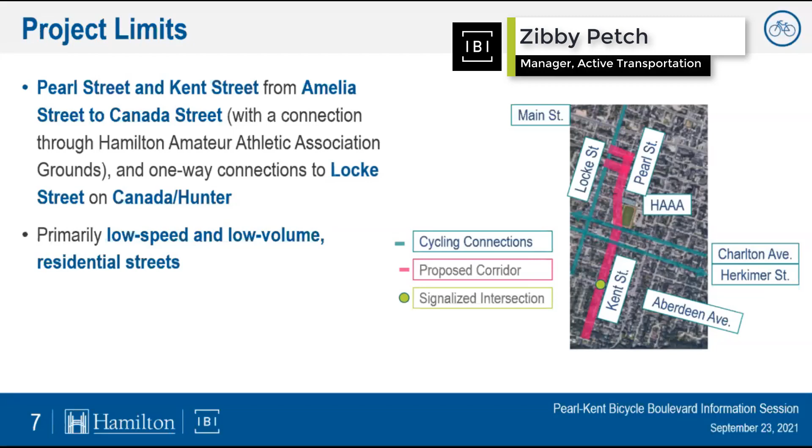Thanks, Trevor. Good evening, everyone. I'll provide an overview of the proposed changes along the corridor, and then we'll open it up to questions. Our project limits include Pearl and Kent Street between Amelia and Canada, along with two short connections along Canada and Hunter to connect to Locke Street.

These are primarily low speed and low volume residential streets now. Through some design changes, there's an opportunity here to create a really attractive corridor for people walking and cycling. From the perspective of the cycling network, this is an important north-south corridor. It provides an alternative to Locke Street through the Kirkendall neighborhood, and it intersects some key east-west cycling routes along Charlton and Herkimer.

The concept of a bicycle boulevard along this corridor was originally identified and funded through the 2018 Ward 1 participatory budget process. There was also a volunteer-led Jane's Walk here in 2019. I'll also note that bike boulevards are identified as part of the city's COVID-19 recovery mobility plan.

Project objectives include expanding the citywide cycling network with connections to existing east-west facilities, enhancing corridor safety and livability through calming vehicular traffic and speeds, as well as opportunities to introduce beautification, and using a pilot approach with rapid implementation to grow our understanding of how bicycle boulevards and applications work in Hamilton.

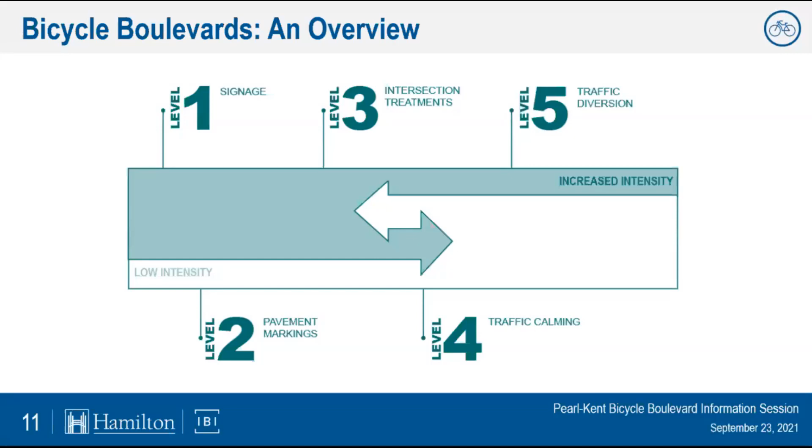This project is proposed to be implemented as a pilot with an opportunity to test the design and adapt it over time. So materials may vary from simple, quick to install materials versus more robust long-term materials. We can test performance over time.

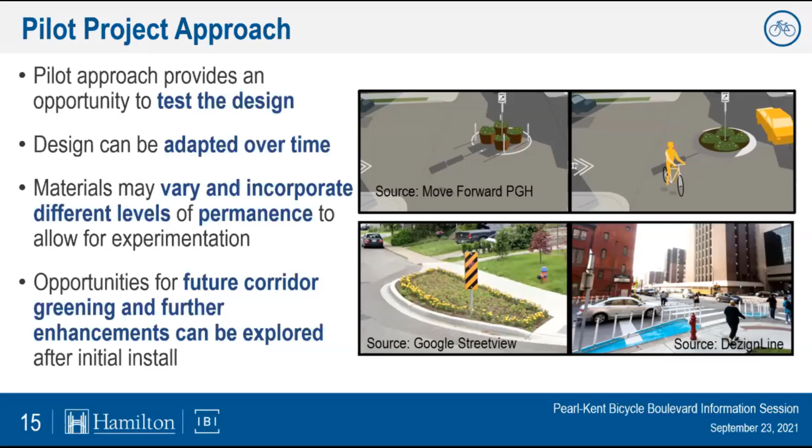Let's start from the bottom of our corridor, Kent Street, and talk about what this looks like. A typical mid-block section along Kent Street will remain very similar to today. There's currently parking on one side with two-way vehicular traffic, and this will remain as is, with just the addition of pavement markings and signage. Parking will not typically be removed mid-block.

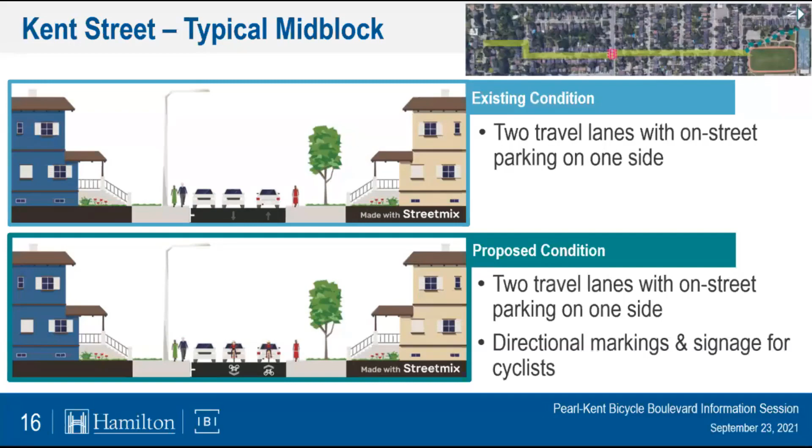We'll walk through the corridor from south to north. To orient you, Amelia is shown on the left of the screen. That's the south end of the corridor. North is to your right. So we'll walk through in that order.

Starting at the south end, you'll see this green line along the full limits of the corridor. That represents the pavement markings and signage that will be throughout. And then you'll see individual features at each location. The first feature you'll see is a curb extension proposed right at the corner of Amelia and Kent, which will help to slow turning vehicles.

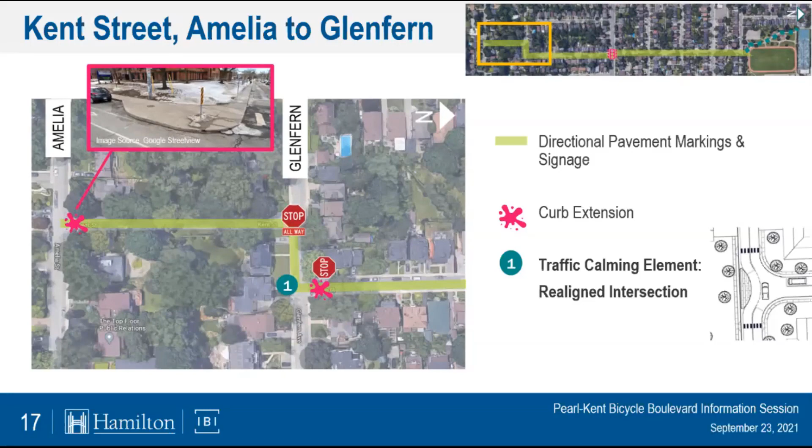Our next feature is proposed at the Glenfern and Kent intersection, proposed as a realigned intersection, again just to control speeds through that intersection.

Moving northerly as we approach Aberdeen, no specific interventions, although we have noted the need to improve detection of cyclists right at the intersection of Aberdeen to make it easier for cyclists to trigger the pedestrian signal at that location. So that may or may not be part of the initial pilot, but it's certainly a need that we've identified.

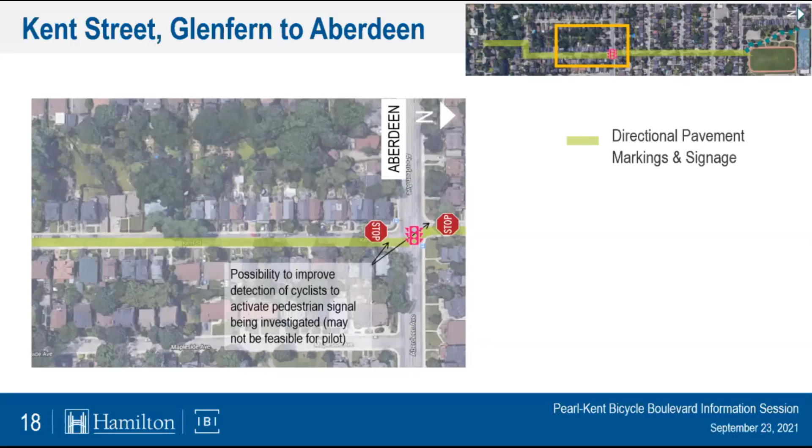Continuing to move north, we've proposed a couple of traffic circles. These would be installed in the middle of the intersection and help to slow turning speeds at the intersections of Homewood and Herkimer, in addition to our pavement markings and signage.

As we approach Charlton and HAAA Park, you'll see that we have proposed one section of contraflow bike lane. This would be a short section just to allow cyclists traveling southbound through the park to make a left turn to continue further south along Kent Street, helping with that offset intersection.

With that introduction of the contraflow bike lane, we do expect to lose about one parking space in that location.

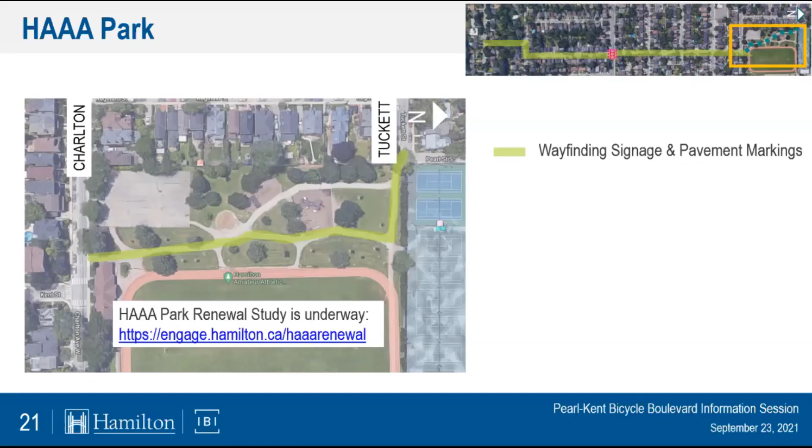The wayfinding elements of the bike boulevard are expected to be carried through HAAA Park to guide people walking and cycling out to Pearl Street. I'll just note that the HAAA Park renewal study is currently underway, and we've got the link there.

Okay, so then we arrive at Pearl Street, continuing to move north. This section of Pearl Street presently operates one-way southbound for vehicles, so in order to provide two-way access for cyclists, we're proposing to add a contraflow northbound bike lane here. I'll show you what that looks like on the next slide.

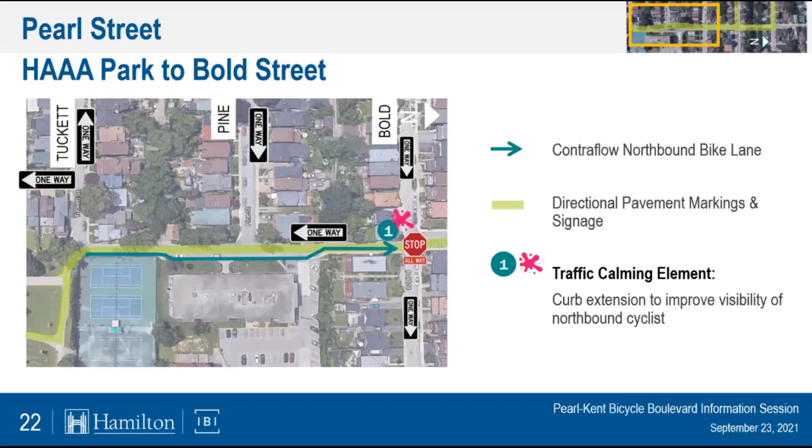With our contraflow bike lane coming down to the intersection of Bold, we're right at the bottom of the hill there. We did want to introduce a curb extension on the south side of Bold just to improve visibility for drivers right at that intersection, to ensure that they can see cyclists and pedestrians coming down that hill.

This should give you a better idea of exactly what's proposed mid-block through this segment. We have two typical sections along this stretch: sections without parking and sections with parking. For sections without parking, we're basically narrowing the existing travel lane and providing a northbound contraflow bike lane along the right side of the road.

Along the frontage of 137 Pearl, there's existing parking. That parking would be maintained, but shifted away from the curb, with our contraflow bike lane coming between the parking and the sidewalk. This has a couple of benefits: a little section of parking-protected bike lane, and improved conditions for pedestrians along that stretch. It's quite constrained there.

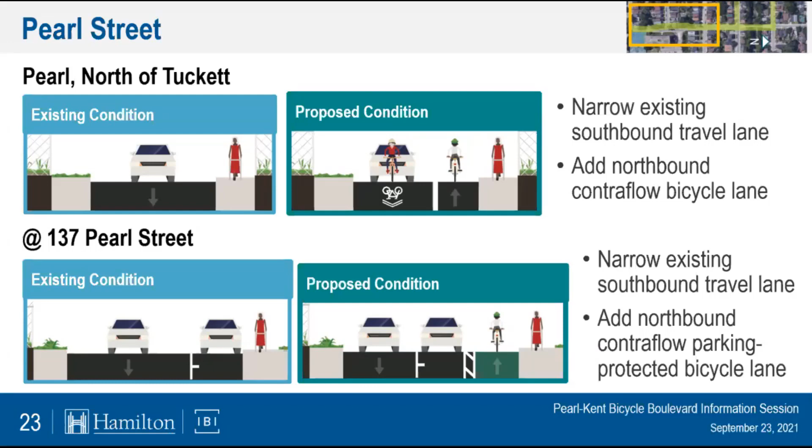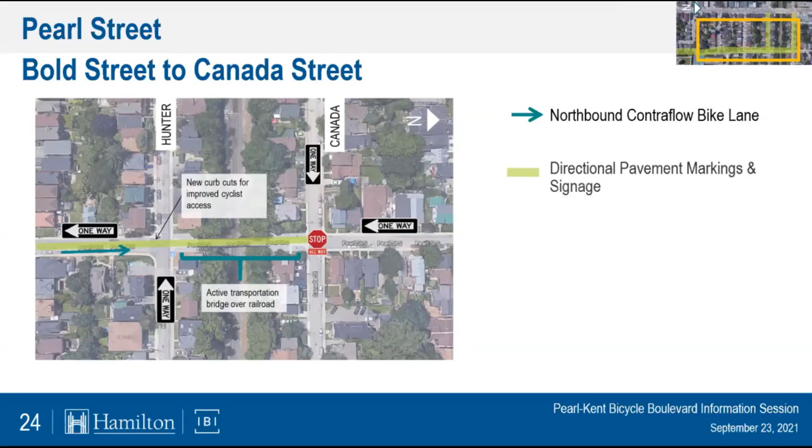As we head north of Bold, approaching Hunter, we will keep the contraflow bike lane on the right side of the road, and I'll show you on the next slide what that cross section looks like. As we approach the existing active transportation bridge, there will be some new curb cuts to help improve access to and from the bridge. Let's take a look at this mid-block section.

The existing condition has parking on the right side of the road. We're proposing to flip the parking to the left side of the road and run the contraflow bike lane up the right side. We don't anticipate a huge change in the number of parking spots based on the driveways on both sides.

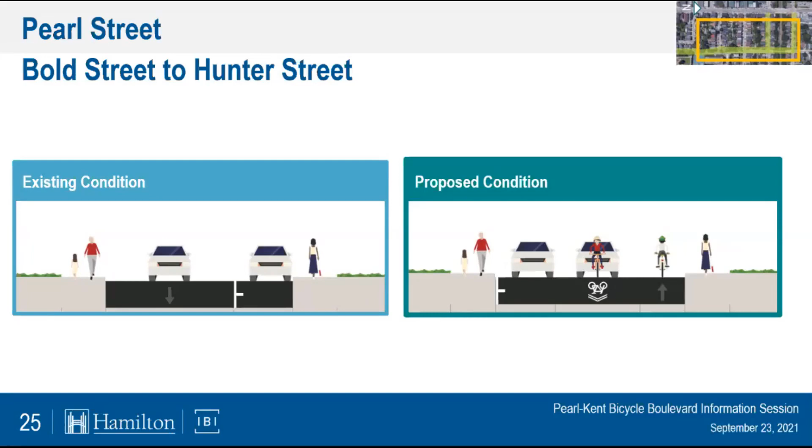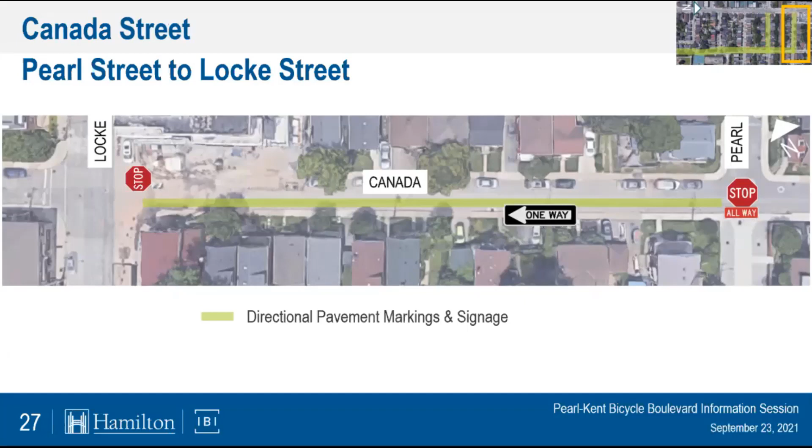And with that, I will turn it back to Trevor to talk about project timelines and next steps.

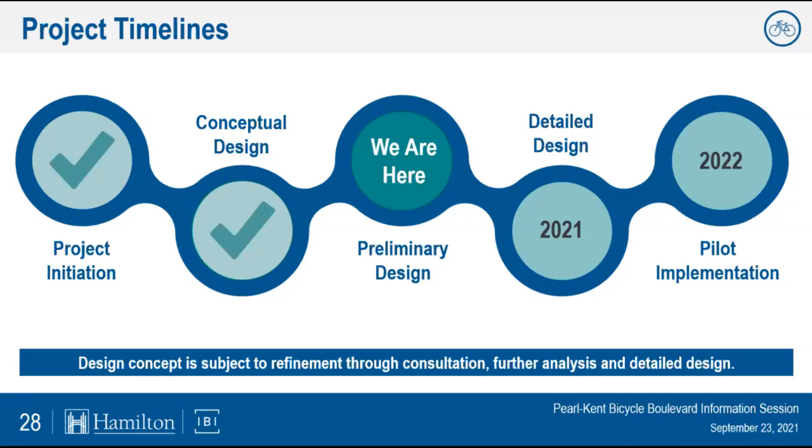Thank you, Zibby. So in terms of where we are, right now we are in the preliminary design stage. This is when we wanted to meet with the community to share information on the preliminary plans, answer your questions, and incorporate your feedback. Moving forward, we will advance to detailed design later this year, and we are looking to implement this project in early 2022. As noted on the slide, this design concept is subject to refinement through consultation, further analysis, and detailed design.

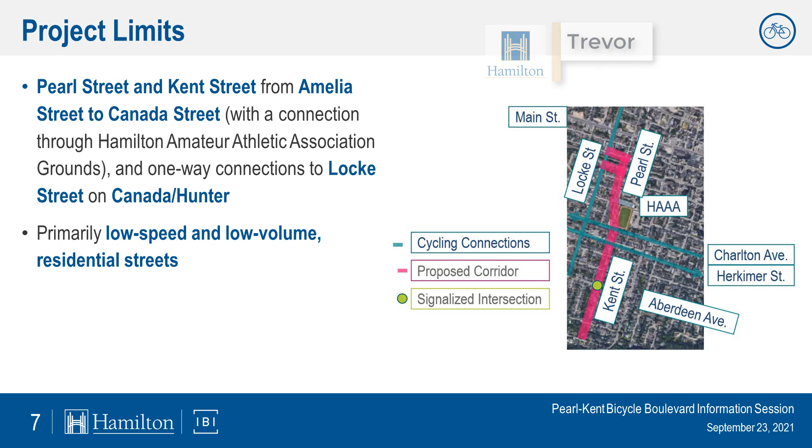I can start answering, and Zibby, feel free to join in. The reason for the connections to the Hunter and Canada section—maybe we can go back to the overview map. It's ultimately to provide for cyclists traveling northbound along Pearl in the Contraflow lane. They would be going onto Hunter Street, so that'd be the natural left in order to connect them with the existing bike lanes that already exist there.

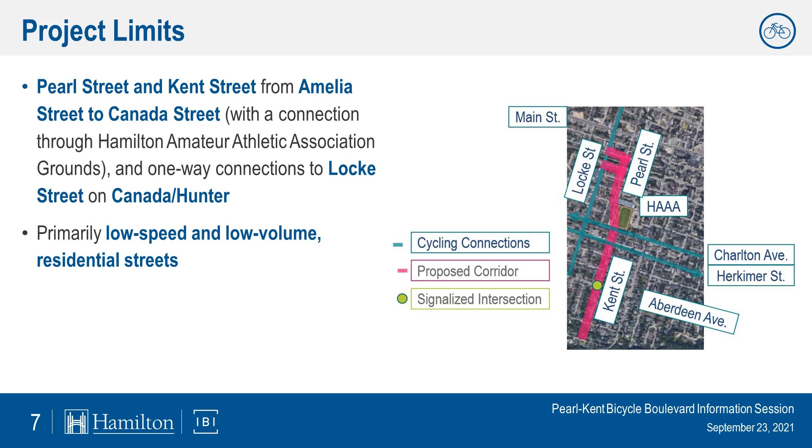Similarly, for the Canada Street connection, it is to connect cyclists traveling along Locke to allow them to travel southbound on the Pearl Street connection. As Zibby mentioned, along those two segments we are only looking at providing pavement markings and wayfinding.

So we don't expect a huge amount, there really is no physical change per se. One of the longer term visions for this corridor is to continue it further north. However, at this time we are still waiting to coordinate with the LRT team on that. So we do want to provide these connections to Locke Street in order to provide that interim measure right now. Anything else to add there, Zibby?

The pavement along this route and through to York is generally poor, which is a huge problem for cyclists right now. Will the street paving be upgraded as part of this project?

I'm just trying to check the programming for repavement within engineering services, because from an operational perspective we don't have any plans to resurface. So we would just be looking to maintain it.

Go ahead—well, sorry, while you're looking at that, I can talk about some work coming to the Strathcona section of Locke as part of some water work that's happening. And then there is discussion on the other portions of the trail of the Boulevard.

My dashboard's not cooperating with me, the asset management dashboard, unfortunately, so I can't answer if that's in the books. But I think the answer to the question is that we aren't looking at doing resurfacing or reconstruction associated with a pilot directly. Yeah, it's indirect. Thanks.

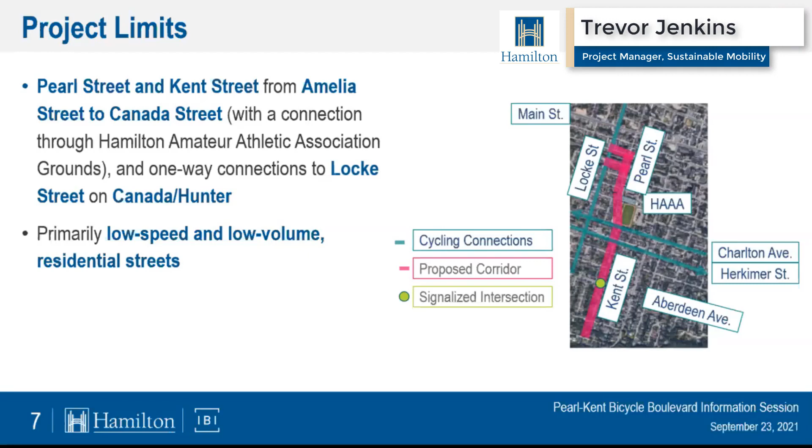Right now, what we do need to do is coordinate those works with the LRT team to make sure any bicycle crossing there is consistent and provided. With the MOU now being signed and that office being staffed, we hope to be able to move forward once we can coordinate with that team. But right now there's no scheduled estimate for when that will happen.

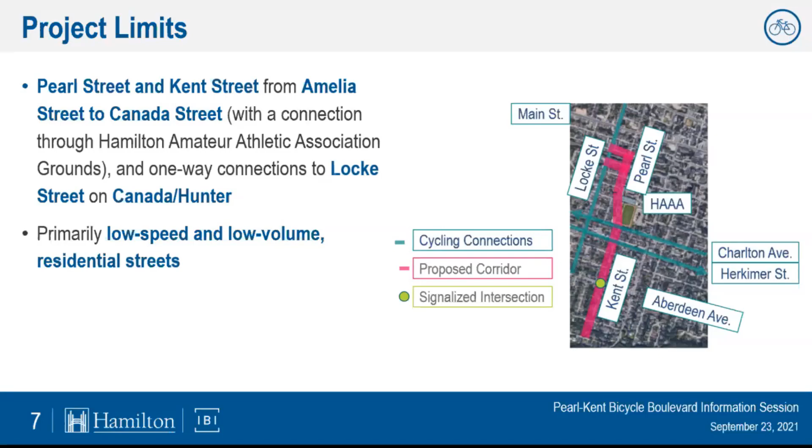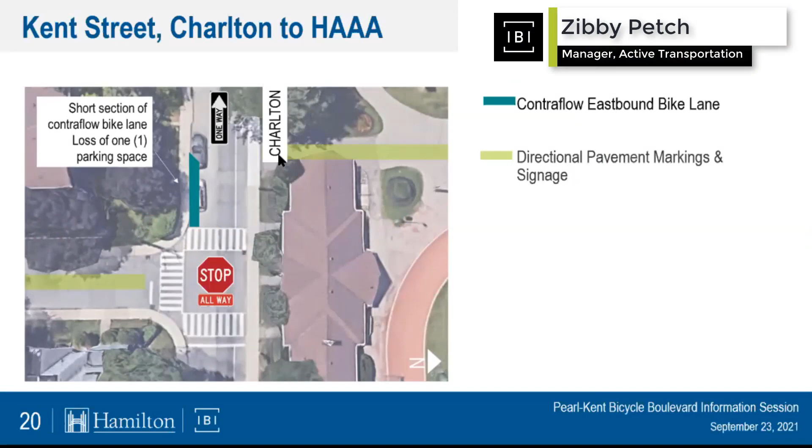How exactly will cyclists traveling south out of the HAAA grounds cross Charlton to the bike lane stub? So as a southbound cyclist coming through HAAA, the onus would be on you to safely negotiate that movement. You wouldn't have right of way to make that movement. You would be looking out for through vehicles and then making that maneuver when safe to do so.

So there's no priority crossing we can provide because we're so close to the intersection. It would just be a yield movement whenever you can find a space to cross.

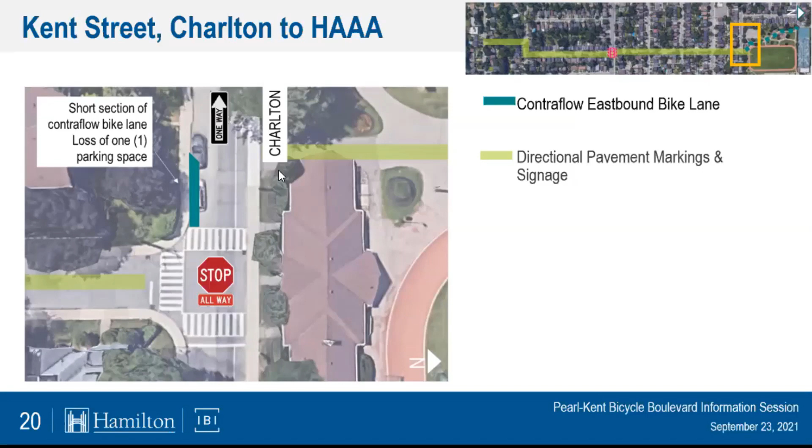Do the traffic circles use any additional space? How do the traffic circles enhance safety for pedestrians, especially children, as this is a primary school route for children walking? Are the traffic circles cement, asphalt, or planted? Do the circles bring traffic any closer to the homes?

I'll start with that, and then maybe hand it over to Zibby and Mike if they want to add anything further. In terms of how the traffic circles help enhance pedestrian safety, one complaint we often hear about with four-way stops is vehicles aren't actually stopping, or they're doing a rolling stop. So by having the traffic circle, it forces drivers to slow down in order to navigate around the feature, which can help provide this more enhanced safety and avoid those who choose to run stop signs.

Similarly, in terms of what the materials are, there are different options. It could be a cement or asphalt one, or a temporary one done with planters. So those are things we are looking into for some different options there.

The more permanent ones tend to be a bit more effective. Zibby, do you want to add anything there?

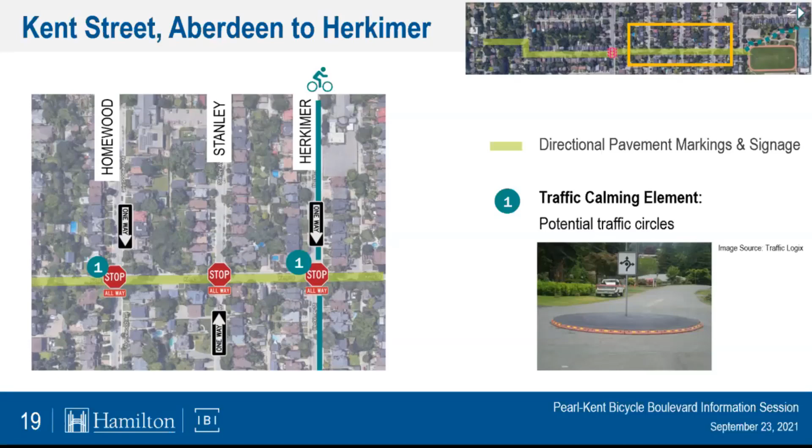The primary purpose of them is to make the movement slower through the intersection. Anytime we can reduce vehicular speeds, we improve safety outcomes, particularly for vulnerable road users. So that's the intent there.

Anything else you want to add, Mike? No, I think you two explained it perfectly. It's all about managing speeds of vehicles through the intersection with safety in mind.

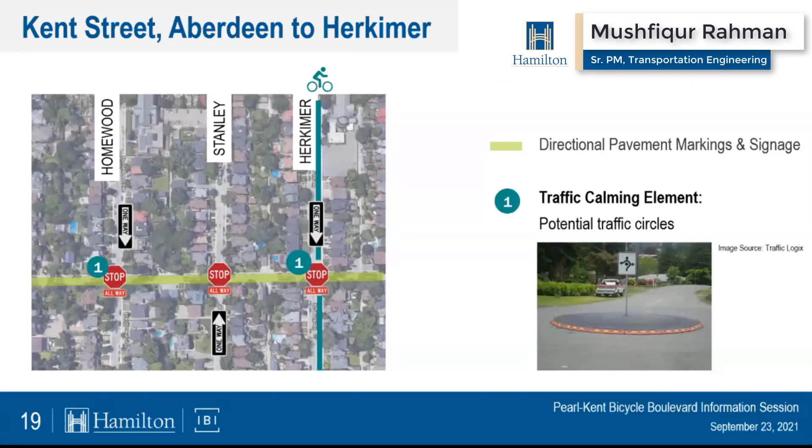The main purpose of a traffic circle is to reduce conflict. At the intersection there are different conflicts, so if we reduce the speed, the amount of conflict is reduced. That's the whole purpose of a traffic circle, basically from a traffic point of view.

It seems like the plan so far has minimal impact on reducing street parking spots. Is that the case, and will that attempt continue with the northern portion or second phase?

Yep, so we are very cognizant that parking is at a premium in this neighborhood. Many of the homes do not have driveways or off-street parking available to them, and we have conducted a number of parking counts throughout the last few months, which really help reiterate this in most of the cases.

As we do look to move to the second phase, that is a priority for us as well, and it is something that we will continue to be very mindful of, trying to preserve on-street parking for the community whenever possible.

Is there going to be a separation between the pedestrian path and the cycle path in the HAAA grounds?

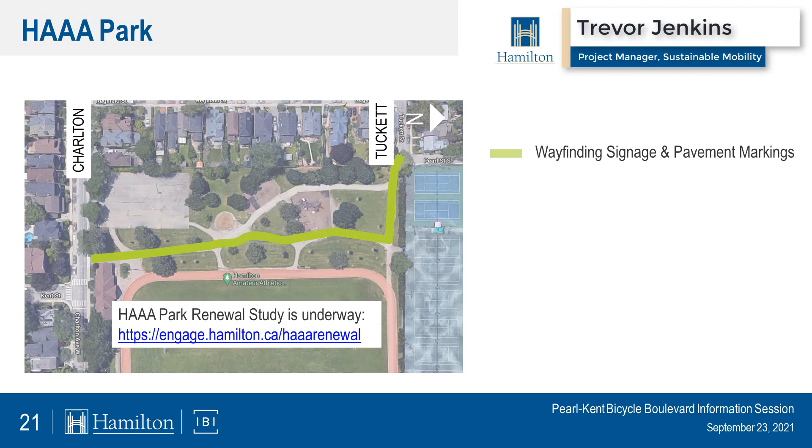So as Zibby mentioned, the HAAA work is still ongoing, the renewal design. We have been in contact with them and have had discussions. One of the focuses of their work -- if you go to engagehamilton.ca/HAAArenewal, some of the design concepts that they presented in June are available there.

So one focus, for instance, is separating the playgrounds from where the cyclists are, since they are very close and have potential for conflict. We have been working with them to provide better separation, particularly between where the younger kids may be playing and enjoying themselves, and the cyclists.

For a bike boulevard, this tends to be families that use it, slower moving people. It's not high-speed road cyclists, for lack of a term. So there tends to be more speed management on their part, and they don't have the same high speeds that some people may be concerned about in other areas.

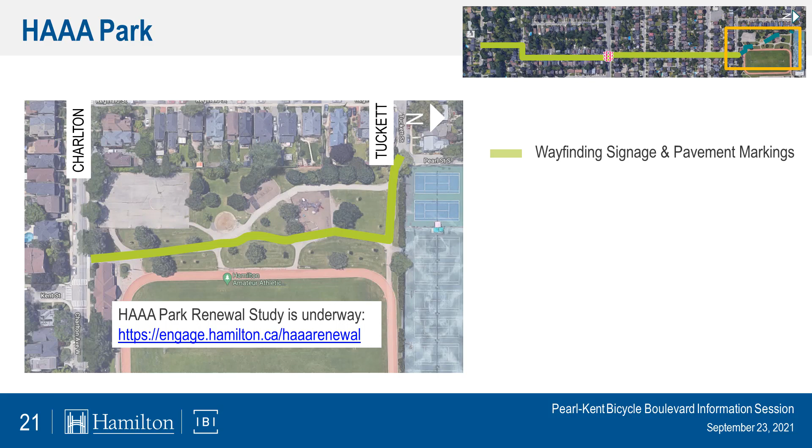He's curious to know, has anyone tried to ride the route from Bold to the HAAA? The hill is very steep, and if using a SoBi bike, most riders will have to walk their bike as there's no gearing. The same applies to the route up the hill from Bold to the pedestrian bridge over the railway. So any thoughts on the fact that we do have two steep hills going north and south?

It might also be a good segue to talk about e-scooters or e-bikes, but I will say we fully acknowledge that those are steep hills. I have walked up them many times. I have yet to bike up them.

From our perspective, we're trying to do everything we can to think about safety at the intersections associated with speed going down the hill, but we recognize that through that block we do have steep hills there, and that may be a deterrent for this route.

That's one of the trade-offs with this route as a bike boulevard, but we feel there are other elements to the connectivity that make this still a worthwhile venture. But totally agree, it's a steep hill. There's not a lot we can do about that topography.

I don't know, Trevor, if you want to chime in on new technologies that may be coming to Hamilton. I think the only thing I'd add to Zibby's comment is, as you approach the mountain, there always will be some climb and some hills. So it's that trade-off: would you rather climb on a quieter street where speeds are managed, or would you want to do it on a busier street? We do recognize there is that hill and that trade-off.

But this corridor does provide good connectivity through Kirkendall, then eventually on to Strathcona, and it does provide a slower, safer place for cyclists to climb. They might be on the SoBi, and whether it's the 3-gear version or the 8-gear version, if they're in the lower gear, they still have a bit of that better climbing ability.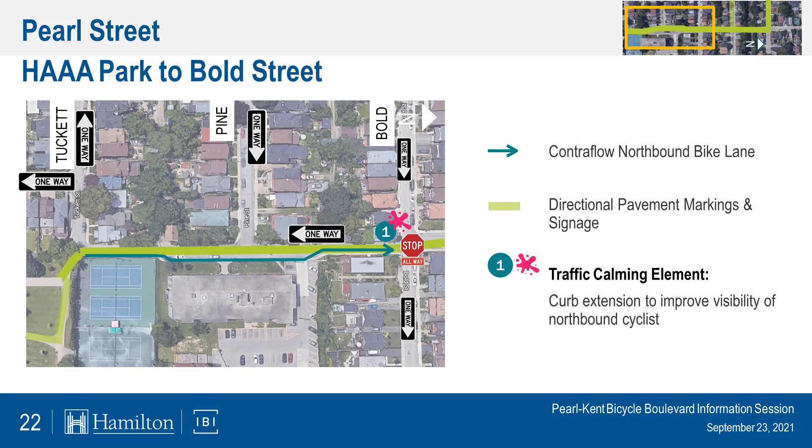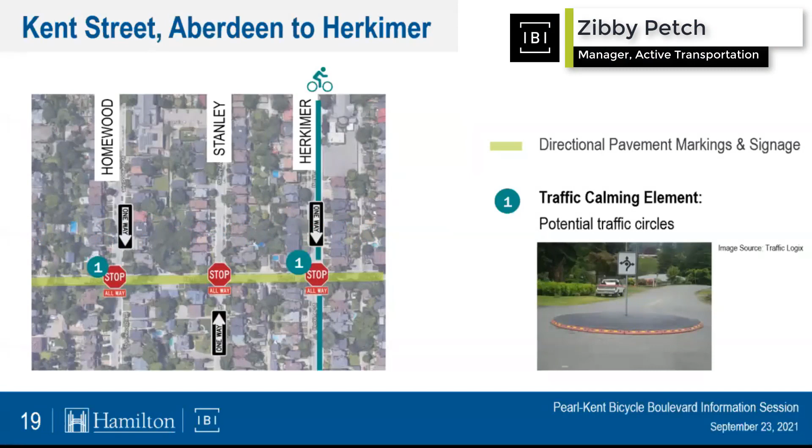Traffic circles bring traffic closer to the homes or property lines. I think maybe it's a concern about as vehicles travel around the traffic circle that they would encroach towards the sidewalk, if I'm interpreting that correctly.

So I'll just say that with any traffic circles or traffic calming interventions, we'll do models of how vehicles move through the intersection. We'll run an auto turn analysis of what that looks like and make sure vehicles can safely navigate that feature without encroaching into the sidewalk or beyond, onto any property. So I wouldn't foresee any concerns with that, and as we advance through the design phases, that would be reviewed very carefully.

Any thoughts about reducing the amount of traffic vehicles on the route? Is cut-through traffic an issue now? Just noticing there are no diverters or other new limitations.

Yeah, so when we did look at the traffic volumes for this corridor, they were fairly low and in the comfortable shared use area zone of the Ontario Traffic Manual Book 18, which guides the selection of different types of cycling facilities. So it was in the appropriate range. If there are concerns about cut-through traffic, we'd love to hear them. Either send us an email or fill out the comment form, and we can review those and do additional study to see if there would be justification for those types of measures as well.

Will the traffic circles be landscaped to add greenery, reduce non-permeable surface, and enhance neighborhood beauty?

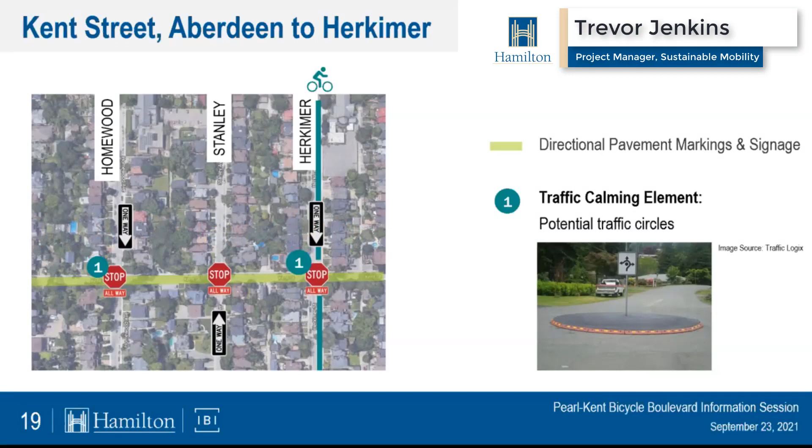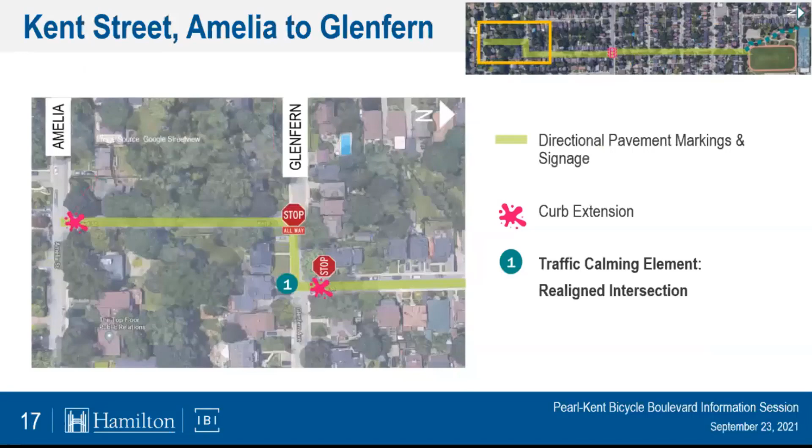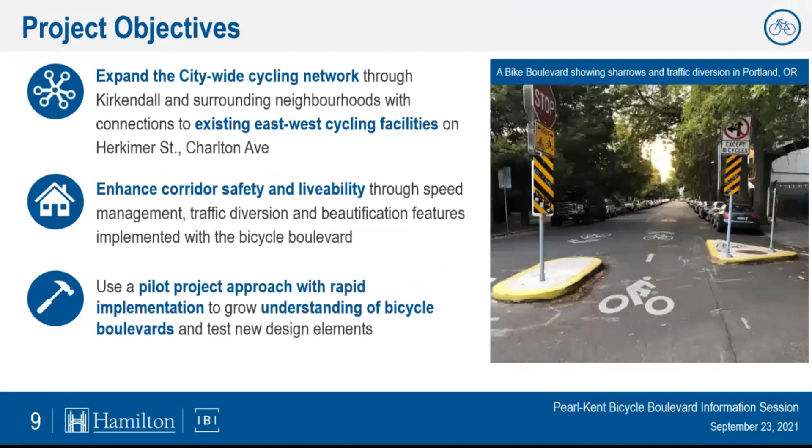So I can start. A permanent traffic circle would be landscaped in some way in order to add some beauty to the neighborhood. If they use a temporary material, it might have some different design features on a temporary basis, like the example that was shown. But really, our goal with any of these traffic calming features is to incorporate as much greening as possible, to respect the neighborhood and show the beauty and value already there, and help support our urban forestry and planting strategy, as well as any climate change aspects.

Kent Street from Stanley to Charlton is very busy during a diversion from the mountain or the highway. How does the emergency detour route impact a bike boulevard?

Yeah, so that's a good point. Those are the type of comments we'd love to see and hear about. If there are issues that your community is experiencing that might not occur on a typical day, it sounds like there are some concerns around traffic infiltration along the section of Kent from Charlton up to Aberdeen area. So we can look into that, take that feedback, and do initial analysis to see if some sort of diverter or other changes might be justified.

So we do have two online ways to get feedback. The first is our online comment form, asking about things you like, things you might have concern about, and any other comments about the proposed design. That's available at hamilton.ca/newlanes, open until October 8th. As well, if you want to provide any additional comments outside of the form, you can email us directly at sustainable.mobility@hamilton.ca. As of noon today, I've replied to any comments I've already received.